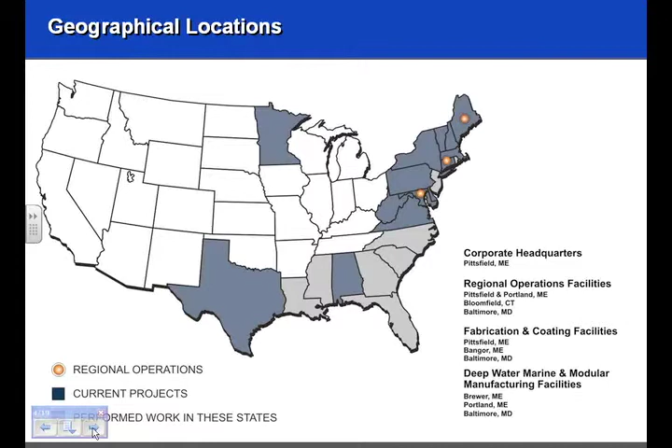So this will give us an HDS overview. I think this is a video, and it will kind of roll through some of this stuff that we've done at our facility and should set up a good base.

In 2007, Cianbro Corporation converted an idle paper mill in Brewer, Maine into a state-of-the-art module manufacturing facility. Cianbro team members produced massive refinery expansion modules, steel frames filled with pipe, electronics, and other components that become the building blocks for the largest refinery expansion in North America. The Leica Scan Station 2 and Cyclone HDS software have been essential in completing this vital project.

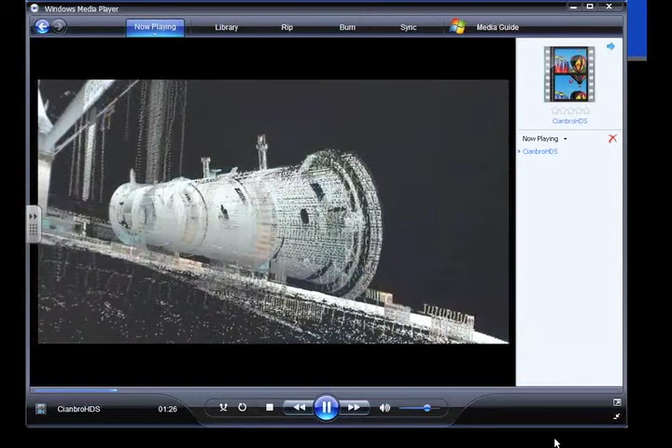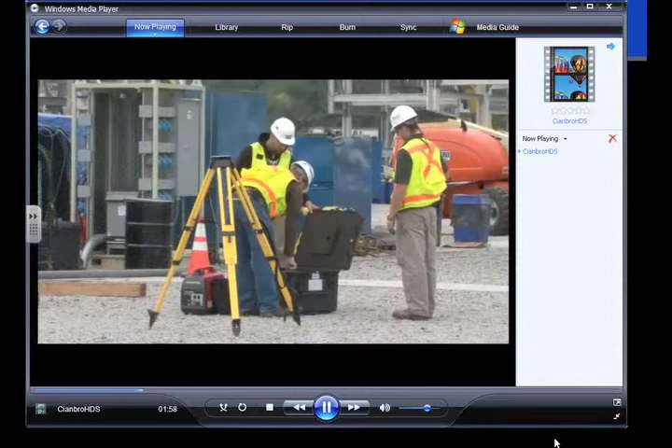We went out and started to locate those points traditionally with the total stations that we have, and we started to paint the baselines. We used the engineered feet we were given, made out of 14-inch H-pile, and started to set those within about 3/8 of an inch of where they're supposed to be so we could start erection.

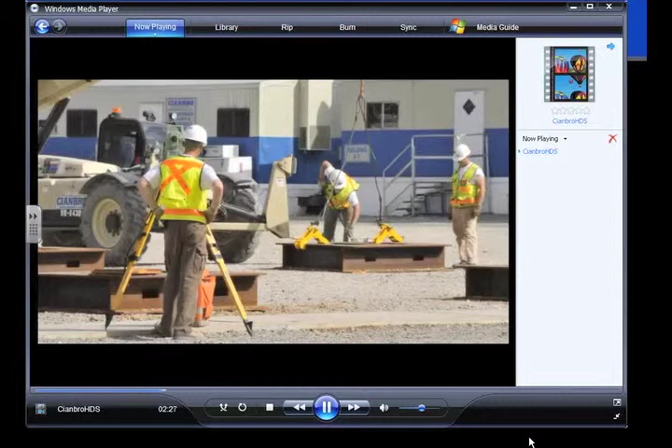Once we've determined where we're going to place the module out in the yard, 2 or 3 of us will go out and paint the column line intersections on the ground. That shows the crew and us where each structural base foot is going to sit, and gives upper management an idea of where a module is going to sit, and whether it will work with the subs and the heavy hauler company as far as moving modules around site into the barge.

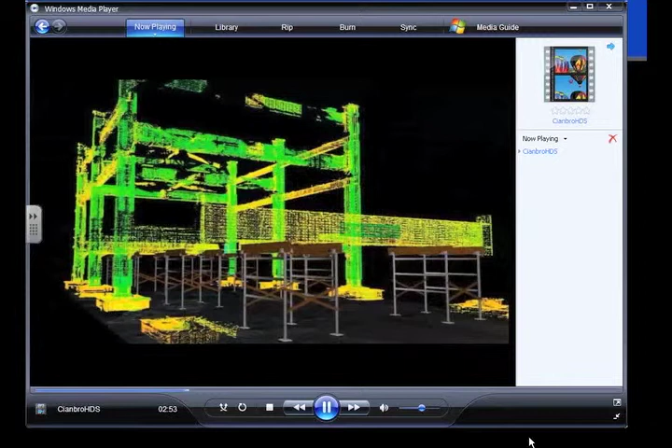Once the bases are set, we set up these shoring towers. The shoring towers help hold the transport beams, which the heavy haulers will back under and pick the modules up.

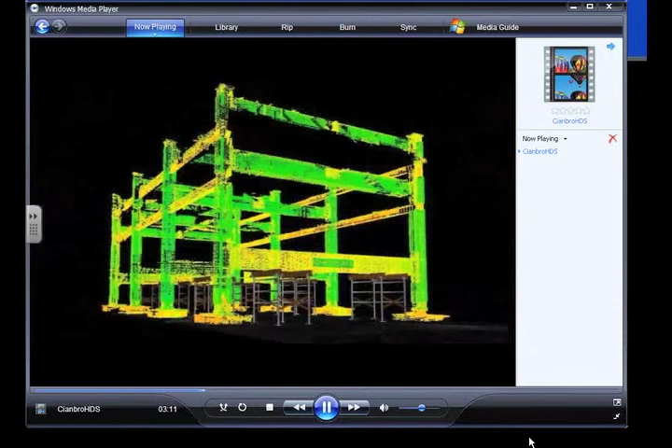And then we set those to an elevation. We typically try to keep those 4 to 5 feet off the ground. That's the ideal height for the heavy haulers to back under them with ease without having to jack it up and lower it before they move. The shoring towers hold those beams, and then we fly in the vertical beams to set those in place on top of the preset base feet.

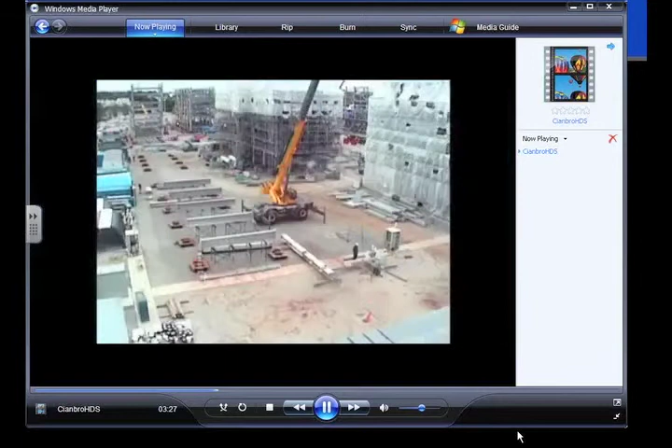As we erect the steel, we also fly in pipe lasagna style. As we put in the layers of steel, we have to put in the larger pieces of pipe because they won't fit. When we first started, we tried to stuff them in from the side, and it took a lot of time, and it was a lot more risky. So now we erect it lasagna style.

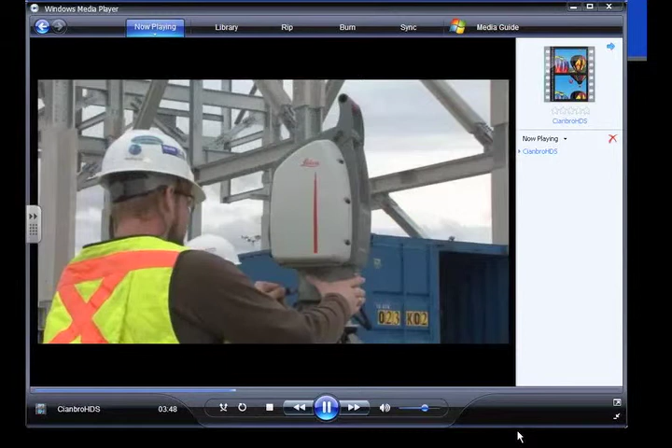We'll bring up the first elevation of steel, rough locate all the locations, and then the iron crews will fly in all the pipe components on that level, and then we'll continue with erection. Once the whole module is erected and most of the pipe is laid in the rack or process module, we'll check it for plumb, verify it, and the torquing crews will go torque it.

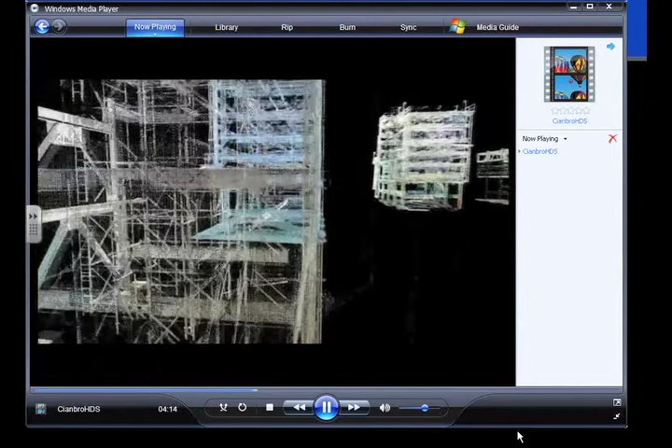Once they're torqued, we'll do a structural sign-off to verify it's spatially square and plumb. To verify square and plumb, we'll traditionally survey some base plates, set up grid control with 2 points, then take the scanner out and scan from 4 points around the module, constrain it to a point cloud, and extract the data from that.

In the structural steel sign-off, we have to verify every piece of horizontal steel for elevation, and all the vertical columns need to be located for location and elevation. So the scanner helps us collect that.

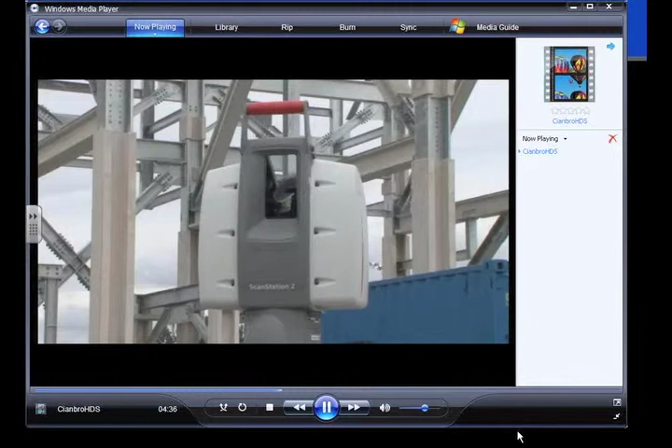If we didn't do it through the scanner or the HDS software, we'd have to do it traditionally. That could take a few days with a man lift and 2 guys in a basket trying to shoot elevation and vertical columns and tie it all in. Plus this all happens while the crews are working, so it's very dynamic and changes day to day.

The scan station allows us to collect all the data we need for the structural sign-off right from the ground, from 4 setups on the ground.

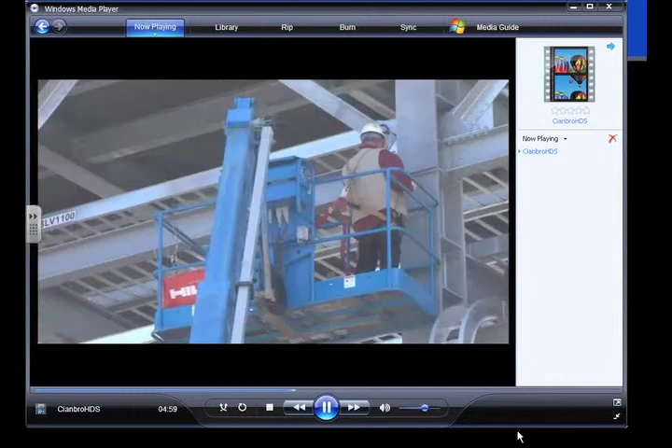If we were to do the structural sign-off conventionally, it would consist of 1 person on the total station and another person up on the prism, right on the edge of the pipe or the edge of the beam, which is 40 or 50 feet in the air, in all types of weather, you never know.

So the scanner allows us to collect data in as safe a manner as possible while minimizing our risk, which is a big deal for us.

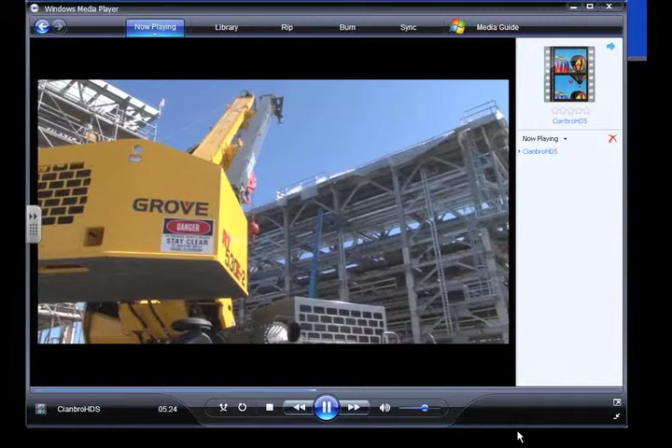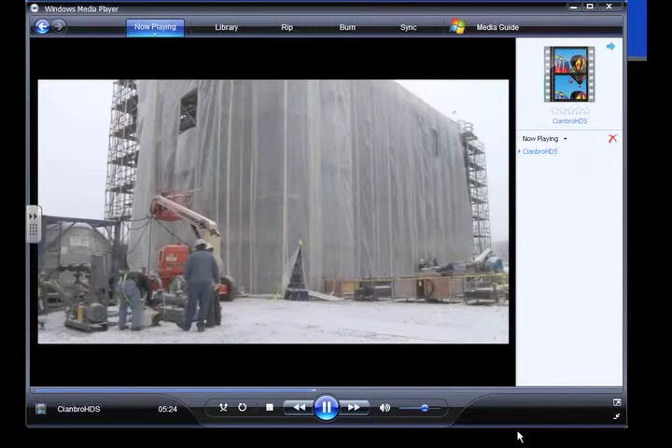The scan station gives us the ability to stay off the steel in foul weather. The steel gets very slippery, whether it's rain or snow. It gives us the ability to scan the module from the ground. There's no way we can slip off the steel while scanning the module from the ground.

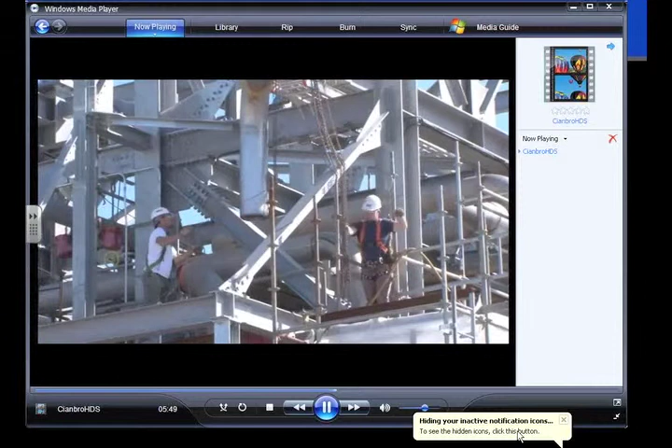The HDS technology allows us to provide technical support to up to 500 craftspeople on site, iron workers, pipe fitters. We can provide them with all the spatial information they need to complete their daily tasks, and we can do that with a minimal crew of 2 to 3 people because of the productivity and efficiency the scanner is capable of.

Once we collect all the data in the field, we'll bring it back, constrain it, put it on the XPS workstation, and work through it to extract the data points we want. We have a preloaded Excel sheet with a table of the desired points from the CAD program we initially had for the layout.

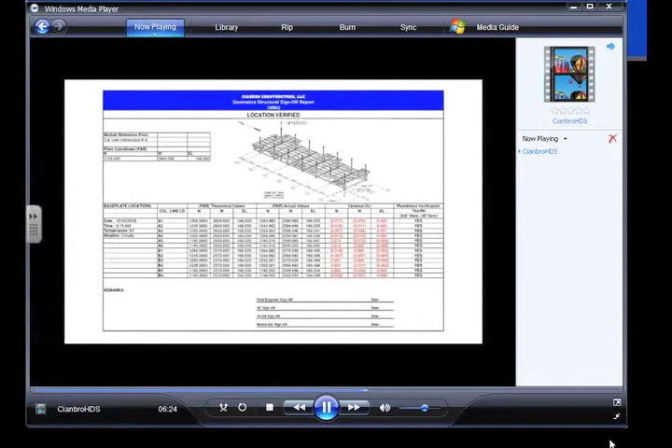We'll take all those points, compare them theoretically in our Excel sheet, and then we wrote a conversion to convert it all to Port Arthur coordinates, which is the only data information that was supplied to us to start with.

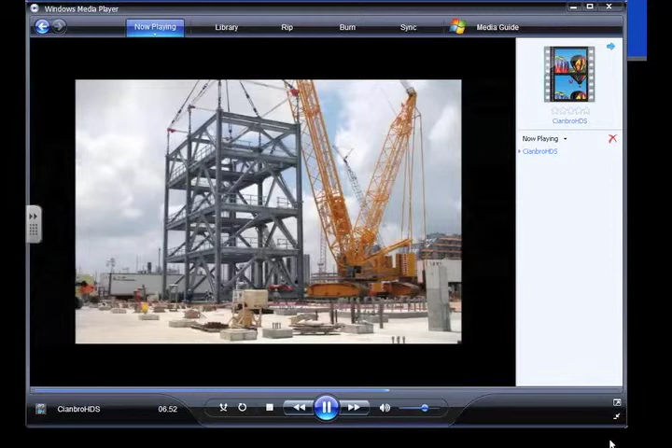As a module fabrication yard, we are supplied with drawings that have plant coordinates on them, in direct relation to the locations of the future modules in Texas. These modules all have a reference point at one column line intersection per module, and from that intersection, all the pipe and structural steel is fabricated.

So they give it to us in Port Arthur coordinates, and we'll deliver the final product back in Port Arthur coordinates. Once the point cloud is all constrained and put in, we'll extract off the base plate information we want and put it in the Excel sheet that has the theoretical locations.

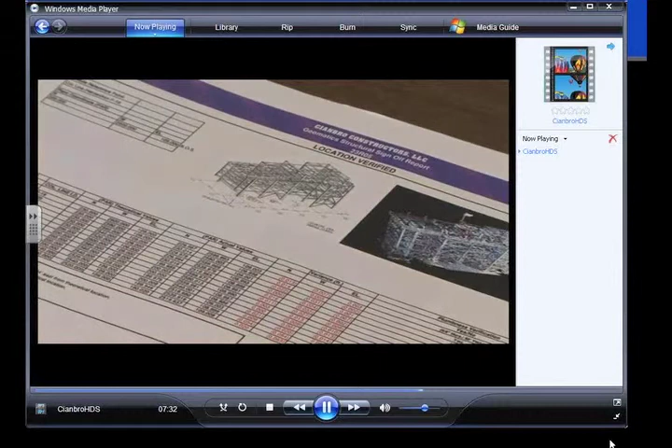We'll then take those, compare them in the Excel sheet, convert them to Port Arthur coordinates, and that will give us the variance, and that will tell us if the module is plumb, square, level, and within spec. If it's within spec, that's good. We verify plumb within 5/8, check that off on the sign-off sheet, and then we go to horizontal framing.

We go through the Cyclone software and pick all the horizontal framing members within probably 2 or 3 different spots on each horizontal piece of steel, and then we verify that as well. That has to be within 1/4 inch of the design height so that all the piping components will fit, and those are within tolerance.

Once the structural steel is all signed off and we've verified everything's good, the crew will go out and we'll put offsets on the module. We put them on all the cantilevers and we put it up the middle, and that helps the craft people locate where the piping goes. It has to be within 1/8 of an inch, so we need really good targets to shoot for.

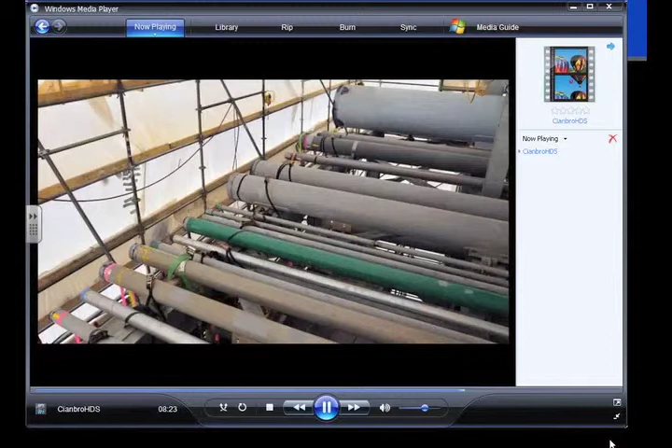Once the offsets are on the module, we give the piping crews the go-ahead to start fine alignment and welding and assembly of all the components. Once all the components are done and all welded up and finished, we do a final verification survey.

We are provided with ISO drawings that have pipe end locations on them, X, Y, and Z values in plant coordinates. We then transfer that into our coordinates on our local pad. We use those to compare what we get in the field. We have a lot of data that we need to crunch.

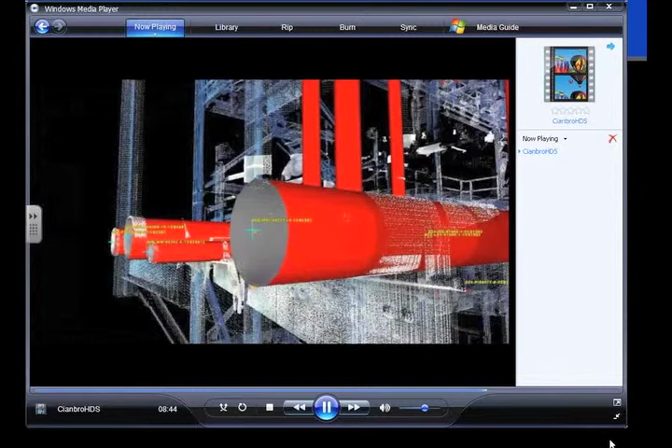So as a check and balance, we use the scanner and the software to visually view our data. It gives us the ability to have a much more visual analysis versus a quantitative analysis.

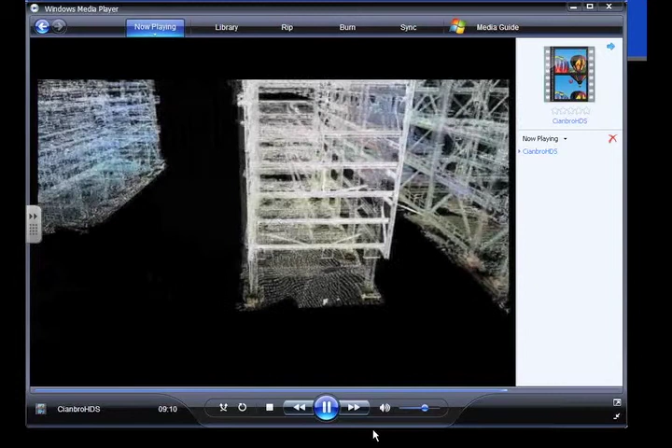Using HDS has allowed us to work on site with a small crew. We can be very efficient. It also has allowed us the flexibility to work off-site. By working off-site, we mean we work with other Cianbro jobs. We help supplement them if they have issues, and we can also go in and help solve other problems or just supplement them with geometry control and everyday layout as well. That's a big help too to a company.

So that's a good little overview of what we did at our Motiva site. That video is available at cianbro.com, and there's some other information there when you look into it to help bring you up to speed on that.

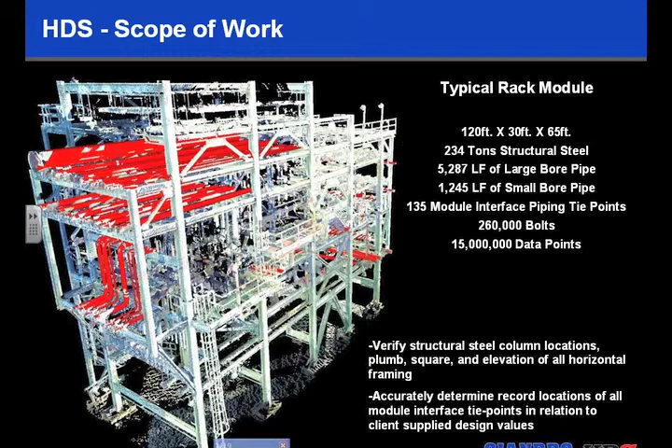We'd verify all the structural steel column locations, plumb, square, and elevation of all the horizontal framing. And then we determine the record location of all the module interface points in relation to the client-supplied design values, which is just a direct comparison of the theoretical.

Some of our benefits: obviously we don't have to work in hazardous weather conditions. We can schedule our scanning around that. So if a storm's coming in, we can either hurry up and scan and work inside while it's raining or snowing. There's a whole pile of thousands of interface points that had to be looked at.

The tolerances on this project were almost so tight that conventional survey wouldn't allow us to survey a whole module in time or in a day to get accurate data. We had real aggressive production goals on this project, so speed and versatility is definitely a factor.

We had a limited fabrication area. In about an area of a 500 by 500 square, there was around 300 to 500 craftspeople plus equipment and modules, and a lot of stuff happening at once. And obviously we were erecting more than one structure at a time, so this helped out a lot with that.

It keeps our technicians off the module. It allows us great repeatability, allows us to get traverse closure reports. We had a crew of only 3 instead of the predetermined 9 or 10 people slated for this project.

We could scan from different locations. We didn't have to survey from fixed points. So if something was in the way, we could always just change the control point. We got accurate 3D models of all the spatial data, and obviously multiple scans of single modules.

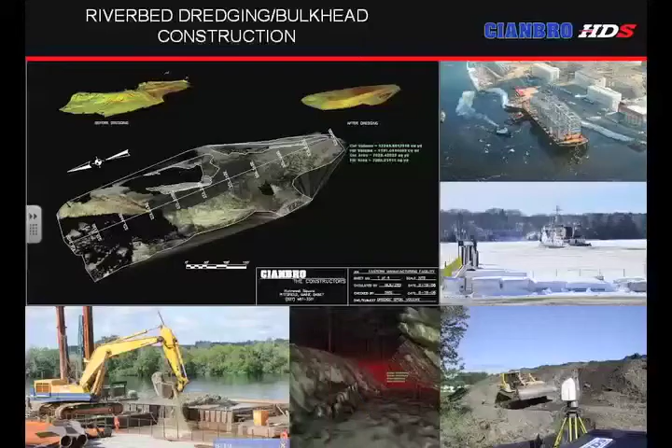Here's some other project we completed while we were doing the Motiva project in our spare time. We did a riverbed dredging and bulkhead construction plan, where we did a volume calculation and an actual volume determination of what was dredged out of the river after it was all dressed up and done.

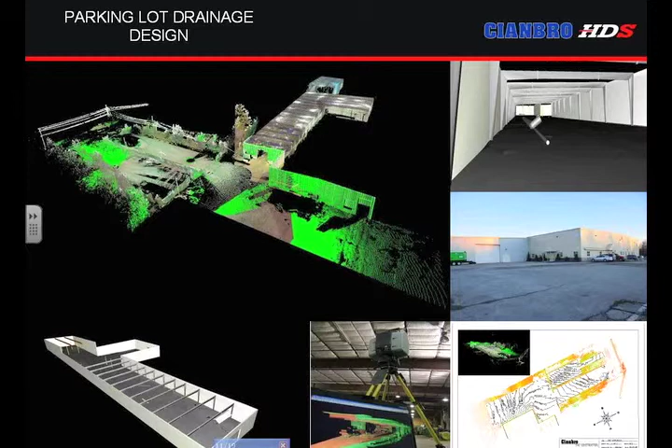We did a lot of parking lot drainage design and some underground utility work here. This is one of our fab shops where we took an abandoned warehouse and turned it into a pipe fab facility.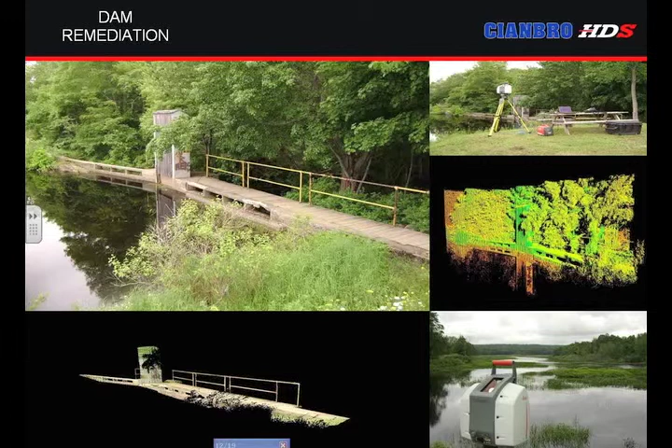Dam remediation. We surveyed this before it was remediated, and obviously we don't have any pictures, but after remediation this became Atlantic salmon habitat. We took the dam out and put in some boulders and riprap and whatnot for baby salmon.

Noise reduction design. This was actually a pretty neat little project - this is our fab shop in Pittsfield. Some of the neighbors were complaining about noise, so we went in and surveyed our whole yard and could quantify all this data and give it to noise design engineers to determine what size retaining wall and what material they need to construct it out of to reduce the noise level going across the street.

Asset liquidation. This was obviously the bread and butter of what HDS was made for. We've surveyed various aggregate piles and stone piles for pretty accurate volume calculations, so when we do purchase this stuff, we actually get what we're buying.

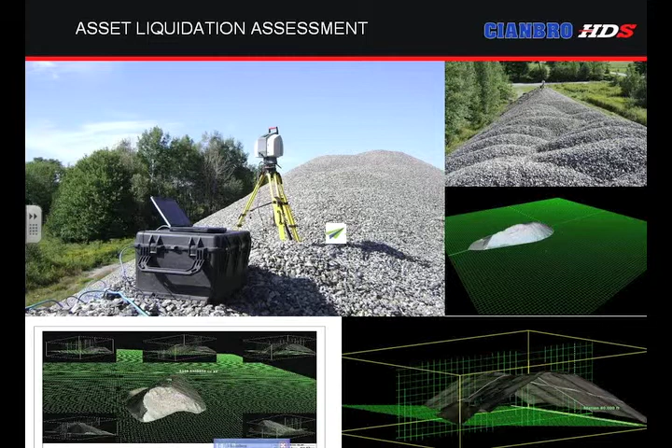Go ahead, Braden. You can talk about this one. This was your project. All right, thanks, Seth. My name is Braden, just hopping in here. Just going to go over probably the end of the slideshow.

But in order to determine what was going to be in the way timber-wise, we had to go scan before we started driving steel pipe pile so that we could get rid of any timber that was in the way, as well as the sheet wall and any interferences there. It was a very useful tool, and we did have some things in the way that we had to remove.

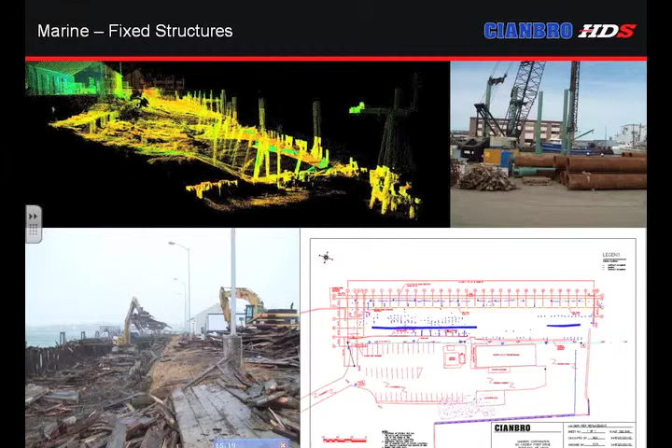This is another project that Seth actually went and scanned - electrical transmission work that we do. We had 4 towers that were typical to each other that needed to be deconstructed, as well as 2 other towers that were typical. Our engineer, Bob Courtney, within the company, actually questioned using the scanner for something like this.

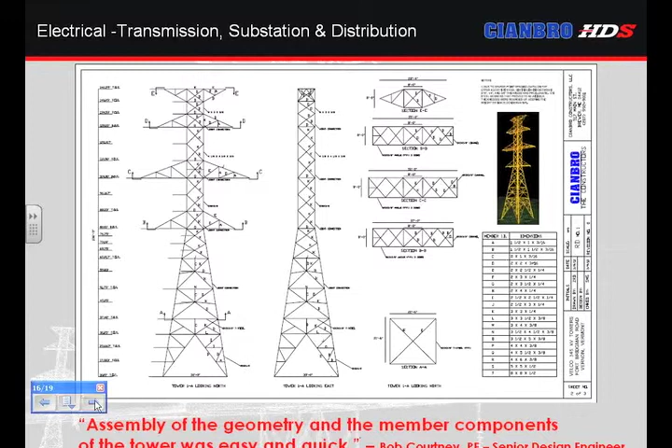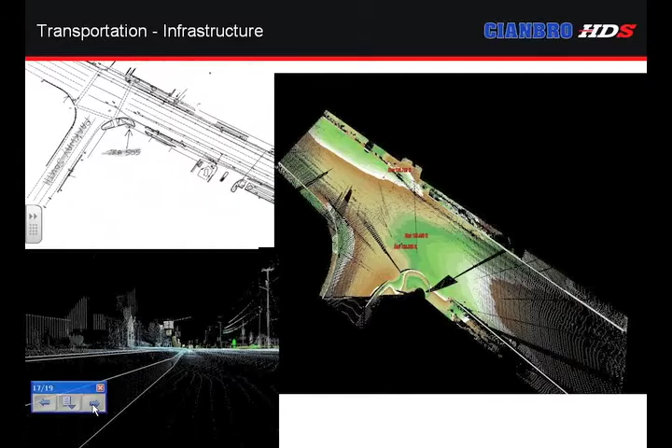A couple questions here. Are there any issues with measuring tolerance in the cold winters of Maine, and likewise having the modules installed in a place like smoking hot Texas?

We have predetermined growth analysis on piping, so we can put that in as a target, so we can get accurate locations. Obviously, it will be different here than it will be down there.

We actually used the scanner. I always go back to this example because I was actually left alone on this day. I give Seth heck about it every day, but it was actually snowing quite hard, and I was able to scan an entire module, and we actually got all the data that we needed. So it's very, very versatile.

Thank you. How did you verify the 1/8 inch tolerance in the scanned model on the Motiva project?

We were supplied the north, east and elevation data. We wrote an Excel sheet to make those interface points compatible to our pad, and then we obviously would direct the steel to the coordinates that we wanted, and then we would obviously survey it, model the last 6 feet of the pipe, and then we would pick that interface point and then compare it.